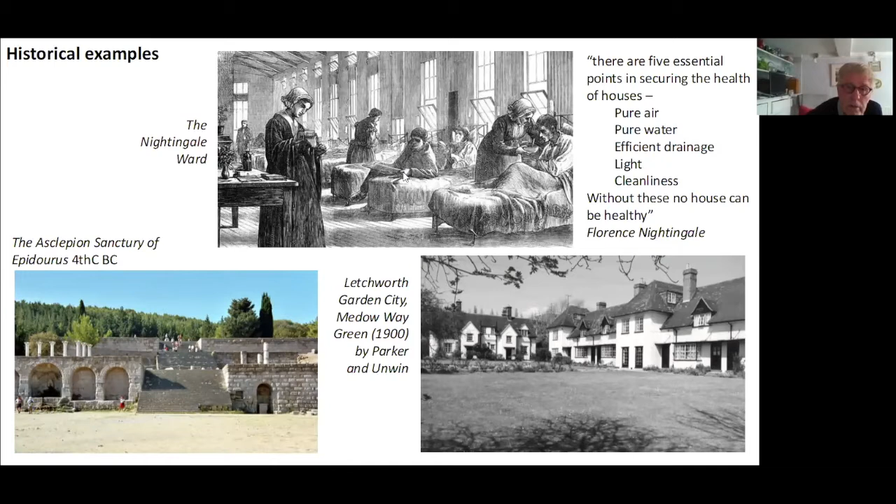The other thing we looked at was standards and codes of practice, and there are quite a number of them: Healthy Homes Barometer, Well Building Standard, 5 Ways of Wellbeing. We found it interesting how they tended to be performance specifications. That is, they said what you ought to achieve, but not often told you very much about how to achieve it. So they weren't really design guidance; it was really what to aspire to. We also found that what to achieve in the performance specification varied very much in kind. So we have things like 5 Ways of Wellbeing: connect, keep active, give, very vague behavioral things. Whereas, sorry, I want to go back a minute.

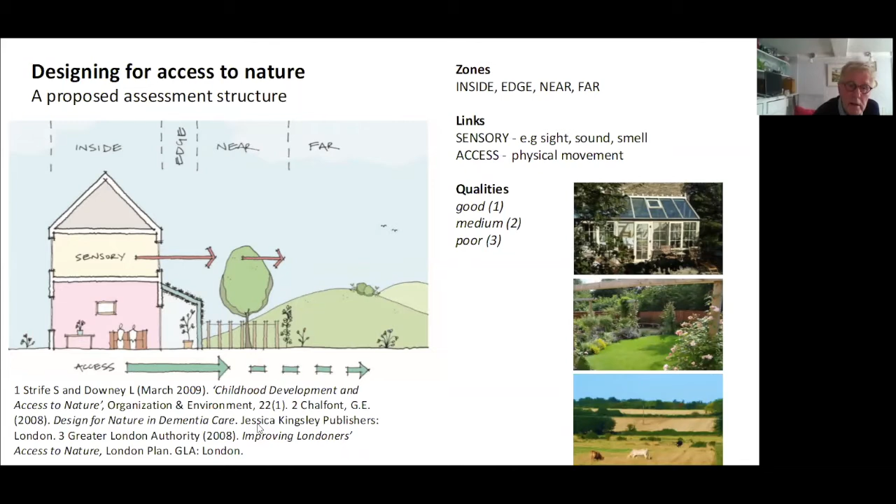So this particular thing we developed largely from the work of Chalfont into a more general form so that we could assess access to nature on all scales. That's basically the idea. And this contrasts the first rather idyllic situation that we showed.

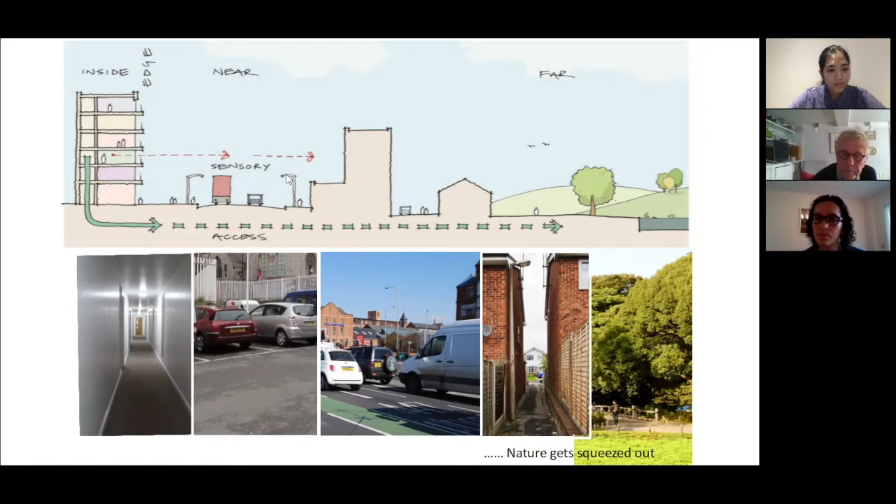And also in this section, we looked at pet keeping, gardening, attracting wildlife. I'll put these all three together. I think it's very unusual. I've never, in my experience of working with architects, heard of them making any design response to enable people to keep animals or pets. And yet about a third of households have a household pet, and I think it's possibly gone even higher now with the COVID lockdown.

And yet we just seem to think they're going to fit into the human environment. Well, that often causes friction with neighbours. And so I think the idea of planning for people to have animals is a perfectly legitimate thing to do. There is some very good data on this. So it's not just a romantic whim about animals.

And the benefits of gardening as therapy have also been well researched. Gardening in itself attracts wildlife. It involves community action. So we're beginning to see how designing for this can meet some of the requirements of those earlier codes of practice.

Attracting wildlife. Wildlife does come into cities. Clearly, it's mainly avian, and there are ways of attracting this, such as the use of water, and it may well be that we will be taking seriously the actual production of food in cities as we move into the next few decades.

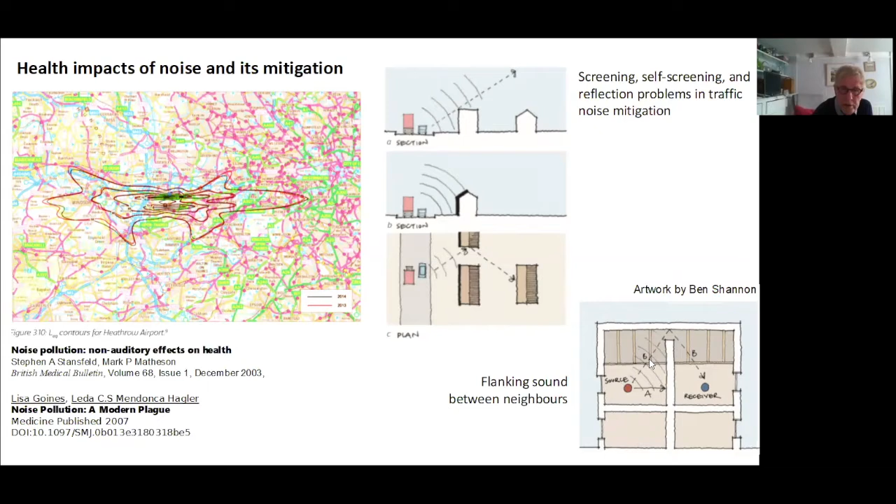Thinking of this as light is not such a bad idea. When I started off teaching students earlier, we actually made some light models of buildings to measure reflected sound, because high frequency sound behaves very similarly to reflection of light. Now we would do it, of course, by simulation. And just a little thing here, problems of neighbor noise. I'm only showing these just as typical examples of the way we handle things.

We sort of tried to carry out what we call descriptive physics, where people are not worried about equations and quantities other than a fair amount or a little. And yet we feel that it's helpful to understand what the mechanism is. So I'm a great believer in descriptive science, where you understand something without necessarily having the quantitative detail of it.

Incidentally, the electric vehicle issue is, of course, partially a local improvement. There's certainly a local improvement, but if the electricity is still being generated from fossil carbon, as much of the world electricity is, then of course it isn't a global improvement.

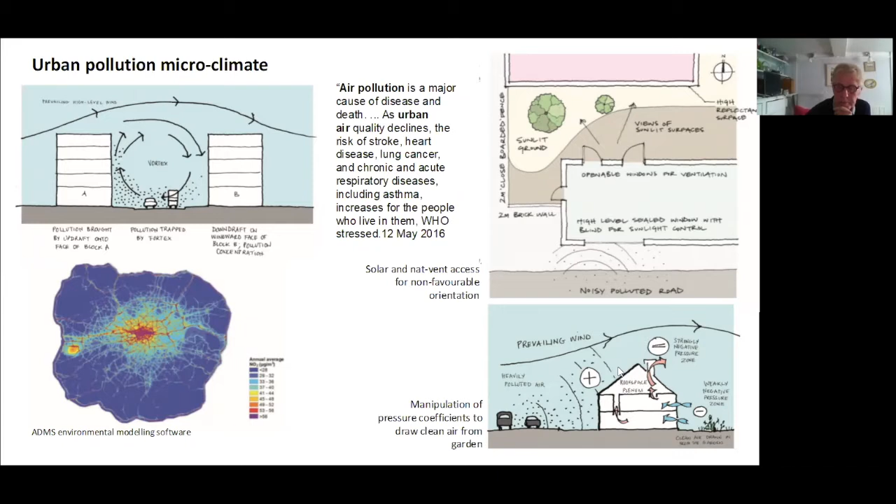The pollution falls off very rapidly, particularly particulate pollution from the road. So we can have openings here and get relatively clean air, even when the wind is blowing from the heavily polluted area. And this is by exploiting the negative pressure at the top, over the surface of the roof.

Now, I should develop a bit of a theme that when we started the book, by the way, I think we were in a sort of lull in environmental concern. It was sort of the growing concern on food security, because I remember talking to Koen, and we said, well, we're just going to assume people already accept the global warming issue and the need for energy conservation. We're not going to drive it home. We'll just assume that's as read.

But since then, in the 4 years that it's taken us to write the book, things have moved on, and we have all sorts of changes of awareness. The situation hasn't changed in 4 years, but the awareness seems to have changed a great deal. We're talking about food security, energy security, and absolute vital needs to reduce our carbon emissions. And so I'm gradually sowing the seeds of the idea that we're now really into a kind of survival situation.

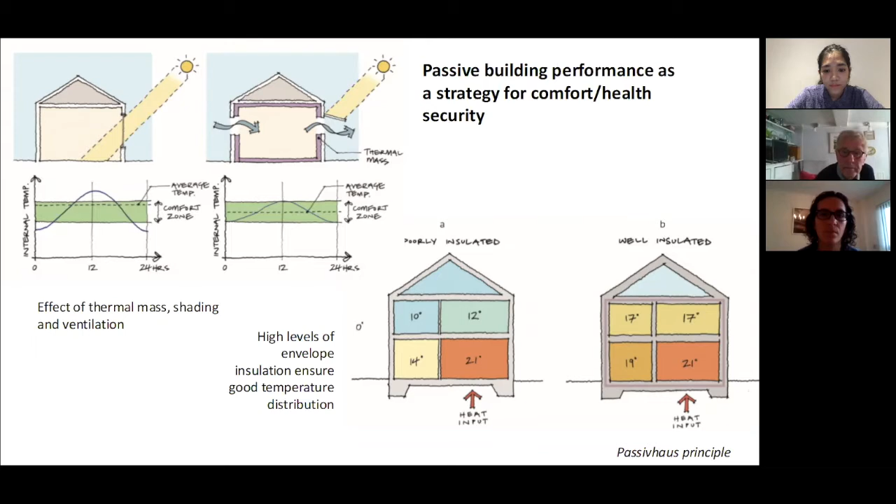And really, as part of that, adaptive comfort has a role to play in the idea of a building which can look after itself. And this is a subject which some of you know is dear to my heart, simply explaining that if we have adaptive opportunity, and by that we mean ability to alter the environment or else our relationship to the environment, then we can cope with a much bigger swing of stimuli, such as temperature, than we can if we have poor or no adaptive ability in a highly serviced building or indeed in a climate chamber. And so we should be trying to move our buildings down into this area with lots of adaptive opportunity.

And here I've just given a couple of examples. This is building in adaptive opportunity. We've got a sunny room here, which if you sit here, you're going to get hot. And here we have a shady room, which may be able to be nicely ventilated. So by simply choosing where you are, you can regulate your own thermal balance and thermal comfort. It also gives a different feeling to the space. So it enriches the space, partly due to the thermal variance, but also due to the spatial variance, because here we're near the outside.

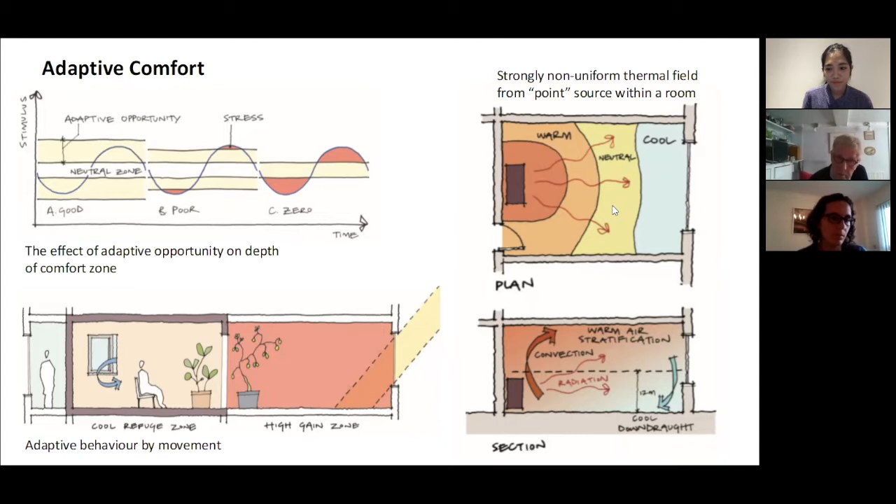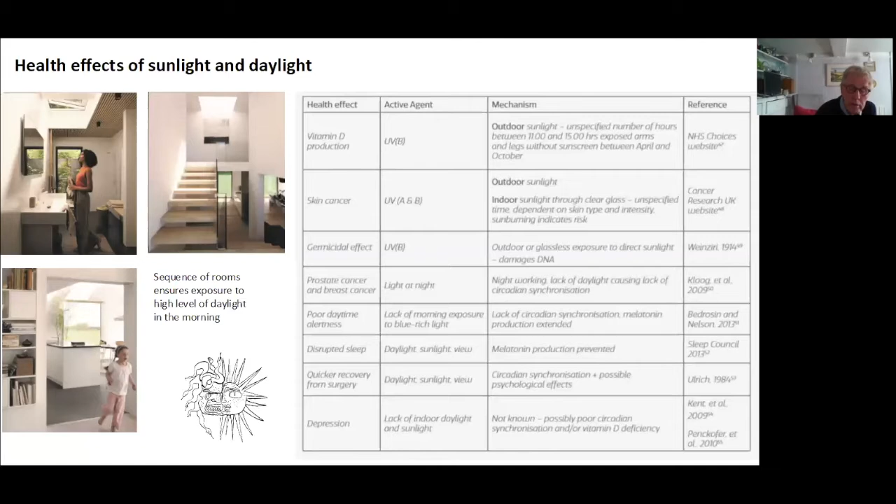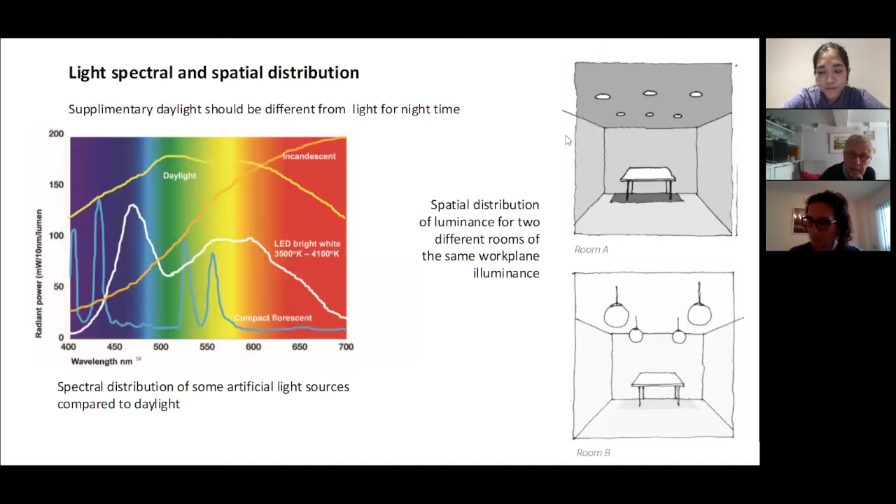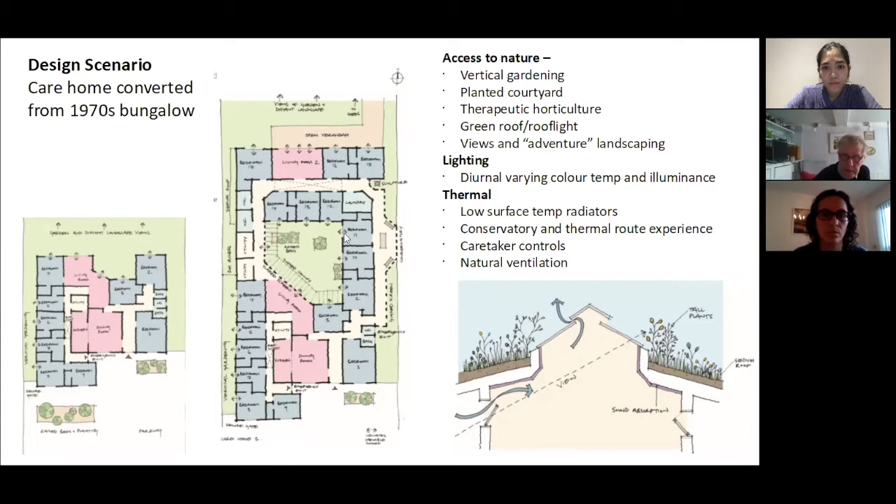There is a constant battle between temperature and ventilation because, of course, the people are very inactive, so they need quite high temperatures. Natural ventilation will be costly in the winter in terms of heating, so there's an interesting conflict there. With this density of people, to ventilate is quite a challenge for natural ventilation.

Okay, now my conclusions. Am I all right for time, Natasha? Hannah? Yep, you're good. Okay, good.

Conclusions then. So the interpretation of evidence-based research is not straightforward. Many of you might be aware of this, but it came as a bit of a shock to us to find out how difficult it is to find the paper that justifies you doing or saying precisely what you are. So you have to make some considerable extrapolations and you have to use judgment.

I often think, well, we do actually accept advice from a lot of people because we trust them. If you buy a good cookery book and it says you beat the eggs for 5 minutes, you don't say, why can't I do it for 7 minutes? Or why can't I do it for 3 minutes? Where's the evidence? You just accept it because you think he's a pretty good cook or chef and I trust him. So we do need to do that in technical books to some extent.

Otherwise, we're going to get to the extent that we will never say anything unless it has actually been determined, and that will limit us a great deal. So that might be a point for discussion afterwards and people's opinion on that.

There is a great deal of difficulty in weighting issues which lead to conflicting design parameters. So big windows, little windows, lots of ventilation, not so much ventilation, all of those things. I cited some other examples in the book. But we do believe that adaptive opportunity in a building allows occupants to make these weighting decisions in situ.